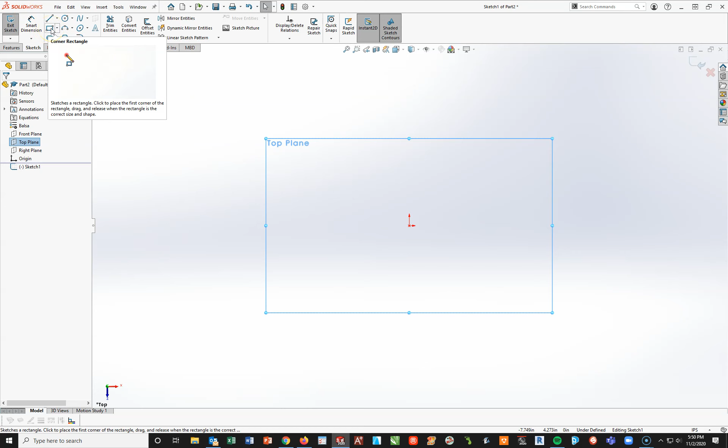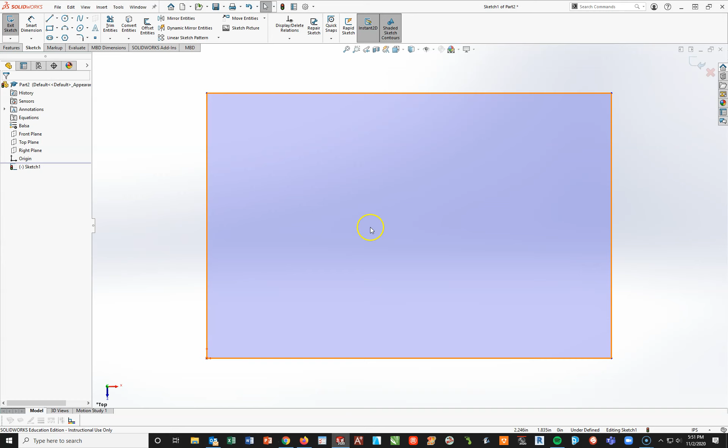Now, again, what I want to do is start on the top plane here with a new sketch. I'm going to start with a corner rectangle that I'll attach to this center point right here and draw up and to my right and left-click a second time. I'm going to escape to turn the tool off, F key to center. Okay, now what I'm going to do is look and see how big this part is. So it looks like it's 4 inches long by 2.5 inches tall. Going back into SOLIDWORKS here, this is going to be 4 inches long by 2.5 inches tall.

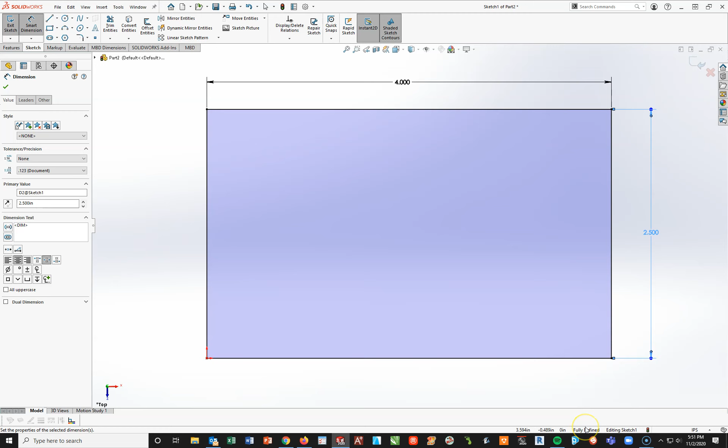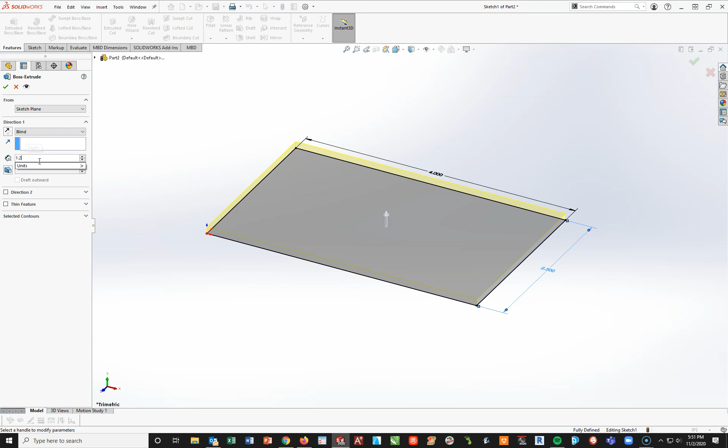All right, now again, I'm looking for color, so I see that all my lines are black, which is a good thing. SOLIDWORKS is happy. I can tell by the word fully defined that all the information SOLIDWORKS needs is there. So now what I'm going to do is go to my Features tab. I'm going to go up to the word Boss Extrude or Extrude Boss Base. SOLIDWORKS is going to orient this into an isometric view and add a 0.1 thickness to it. Okay, now we don't want to lock in at this 0.1 thickness. We want to change that from 0.1 to 1 1/4, 1.25. Hit Enter, and then hit your green check mark. Hit my F key to center that up.

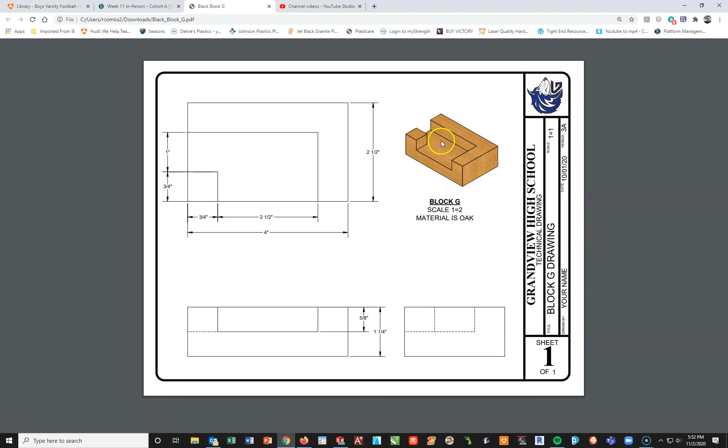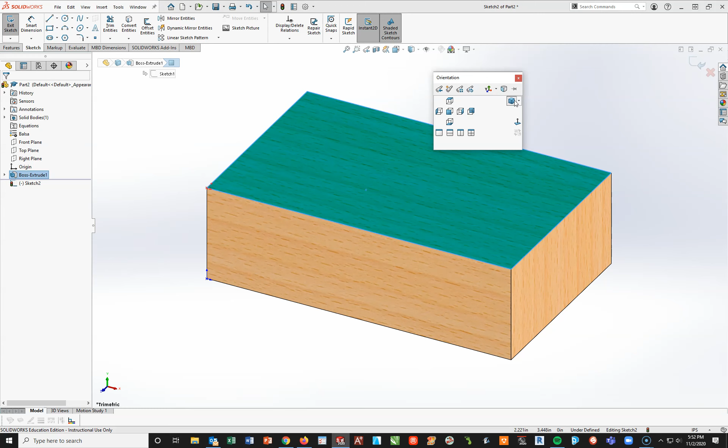Now, what I want to do is I want to take a chunk of this piece of wood out of this. Okay, so if you look at the drawing again, I want to take a chunk out of here. So I'm going to click on the top surface and create a new sketch that I will be able to cut down. So going back into my SOLIDWORKS here, I'm going to highlight the top face so it turns blue. And I'm going to turn on my sketch toolbar and hit the word sketch. Now to get it to orient flat to the screen, I'm going to do a space bar and a normal to.

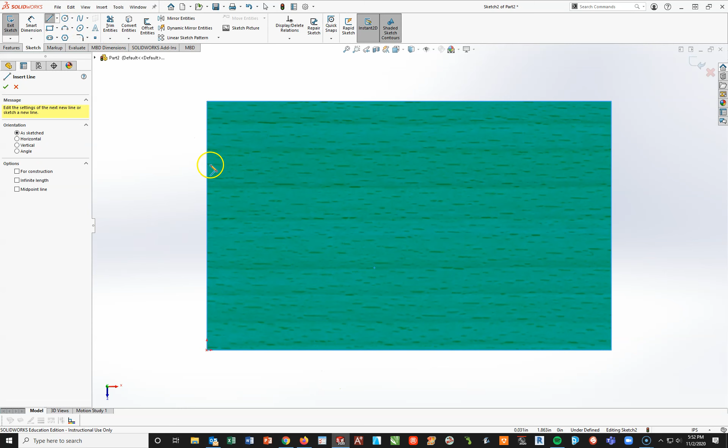Now from here, what I'm going to do is begin to create the shape that you see right here. So I'm going to start with a line, kind of come down, over, up, and then over and close. All right, so going back to SOLIDWORKS, I'm going to start with my line tool somewhere up along this edge, draw out to my right, draw down to the bottom here, over a little bit, go up, to my left, and close. Okay, so now I've got this closed figure. I have the right shape, but now what I need to do is get it to the right size.

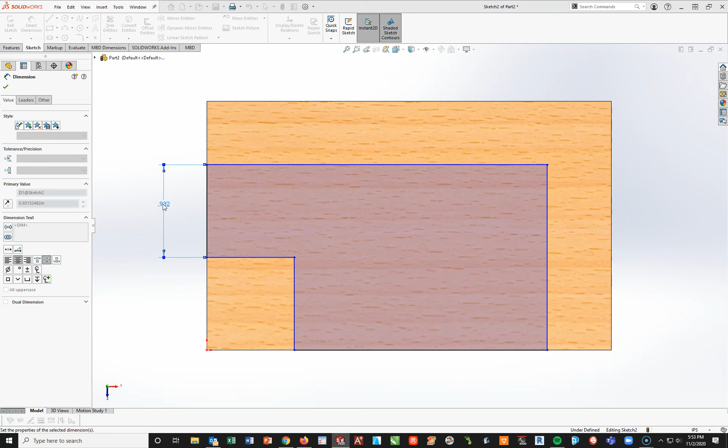So now let's go take a peek at what numbers we're dealing with here. So it looks like this part of the cut is 1 inch. This will be 3/4 inches in, and this is 2.5 inches. Okay, so I'm going to go back to SOLIDWORKS and add those in. One inch. This will be 0.75, as this will also be 0.75, and this here will be 2.5.

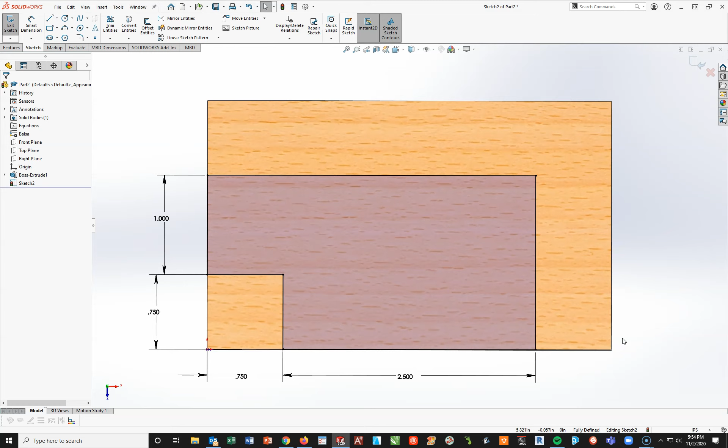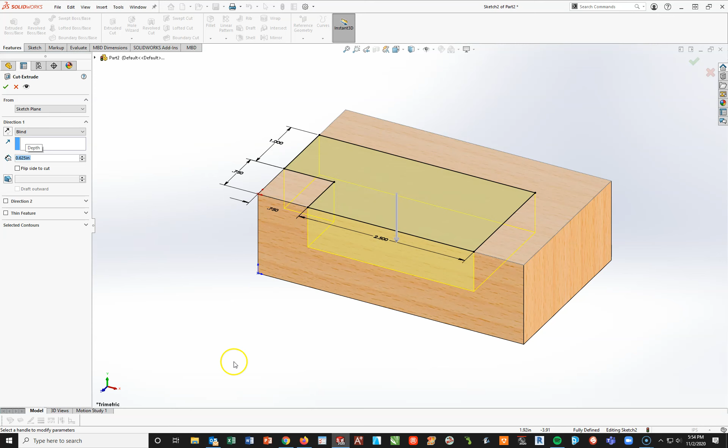And just like that, SOLIDWORKS is happy with the color. It's black, that's what we want. It shows closed, I see the blue figure on there, so now what I can do is start cutting the material away. To turn off my dimension tool, though, I'm going to hit Escape. Then I'm going to rotate my part by hitting the space bar and clicking on Isometric View. I'm going to go to my Features toolbar, since this is a three-dimensional cut, and now I'm going to go to Extruded Cut. And what I want to do is change this from 1.25 to 5 divided by 8 and hit Enter. I hit my check mark, and there is the finished product.

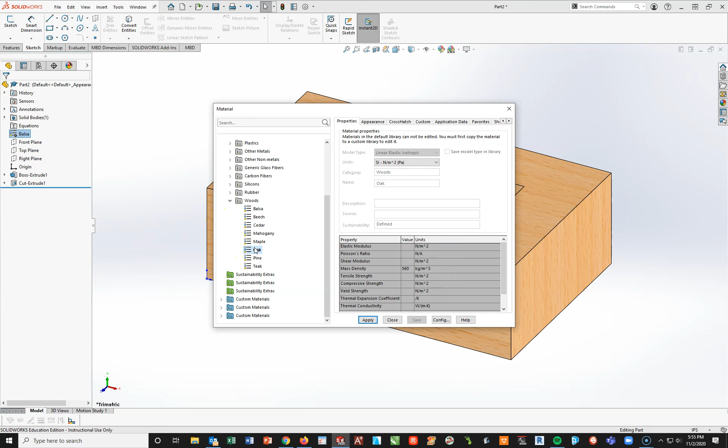Okay. However, I've got to check to see what is the material. In this case, we're going to make it out of oak. All right. So I go back to SOLIDWORKS here, where it says balsa or material not specified. You're going to right-click. You're going to go down to Edit Material, left-click, and then you're going to take your cursor and move it down to the bottom. Expand the Woods folder and pick the word oak. Apply, close. And there is your finished product.